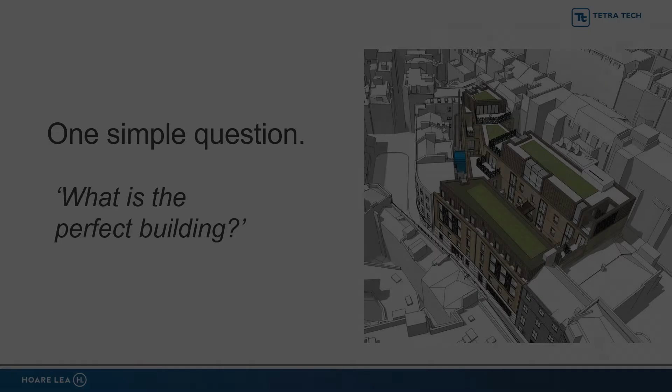It's quite a simple question: what is the perfect building? My name is Roger Mackley, and I work for a company called Hoare Lea. We're part of the Tetra Tech high-performance buildings group. We've been doing building services engineering since about 1862.

So arguably, we're probably reasonably well qualified to answer this question. A little while ago, about a year and a half ago, I had a meeting with 8 colleagues from an organization who run a lot of buildings in the UK, and I asked them this question. Funnily enough, I ended up with 8 totally different answers. What a disaster. Now, what was interesting was a couple of things. Firstly, some of them were mutually exclusive, so I couldn't have my perfect building satisfying all of those commitments. The second thing was, because there were 8 people in the room and 8 different answers, that in its own right meant that all buildings will be viewed from the position of the person who's looking. Obvious, really.

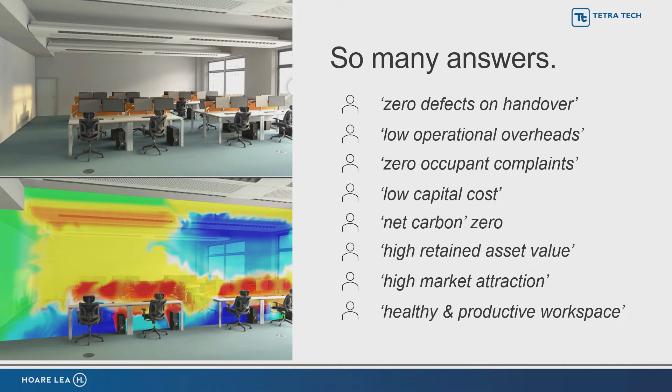So the reason I want to talk about this is because of the importance. Now, I'm going to look at this from purely and simply an environmental standpoint, so I'm just one of those people looking into the building. But I wanted to put the context in.

In the next 10 years, the population on Earth is expected to grow by 1 billion. By 2050, at this current rate, we're going to have another 2.5 billion people on the planet. People spend about 85% of their time in buildings, and as a consequence, buildings are responsible for about 38% of global emissions. But this gets magnified because 2/3 of the global population live in cities. Cities are made up of buildings, and cities consume 75% of the global resources and are responsible for 80% of global emissions.

So yes, having those perfect buildings really is important, certainly when viewed from a sustainable and environmental standpoint. There are, though, these challenges. At Hoare Lea, we look at human-centric design and we look at planet-conscious design, and there is this tension associated with those two.

Buildings are there to provide environments in which people can be productive. If we're talking about hotels, one of those metrics of productivity will be the amount of sleep you had at a hotel. If we're talking about conference centers, presumably we're not trying to get you to sleep. So therefore, we have different metrics for those different things. But because we are trying to generate that environment in a building for people to be productive, by default we are manipulating the environment. We're using mechanical systems, we're using electrical systems, and as a consequence, we are drawing down on the resources of the planet. So there is that challenge.

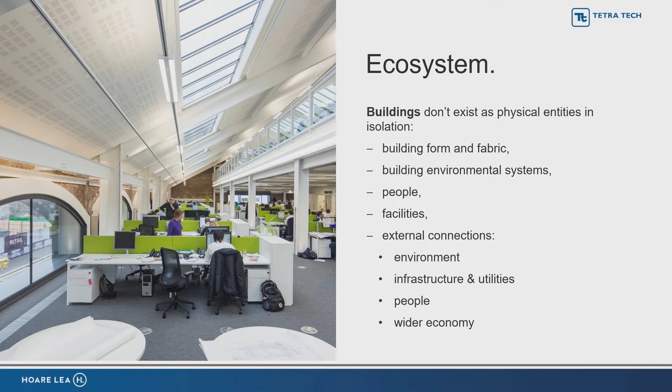But of course, what you can't see here is that you've also got the air conditioning systems, the heating, the cooling, the ventilation system, the hot water. What you also have, of course, is people going in and out of the building. And you can't see it here, but obviously there's the outside world as well.

So we're now looking at a whole series of different data sets from different systems which normally are independent. But if you start to bring them all together, you can then generate actions to try to generate that perfect building. We look at the data layering.

So in this case, for this office, you're saying, okay, well, where is everybody? Where are people in the office? Where have they come from and where are they going to? Because where they came from will impact the sort of environment they want to be in when they get there. Because if it's been really hot outside, they'll want the room they're going to go into to be cooler.

We then obviously have the air conditioning systems, the heating, the cooling, the air quality, carbon dioxide, volatile organic compounds. You've then got the day of the week, or the day of the year, the time of the day. And that's important because we want to be able to move the blinds because we know where the sun will be. The sun is a kind of a given. You know where it is every day of the year. And we think that indoor GIS can really help with this.

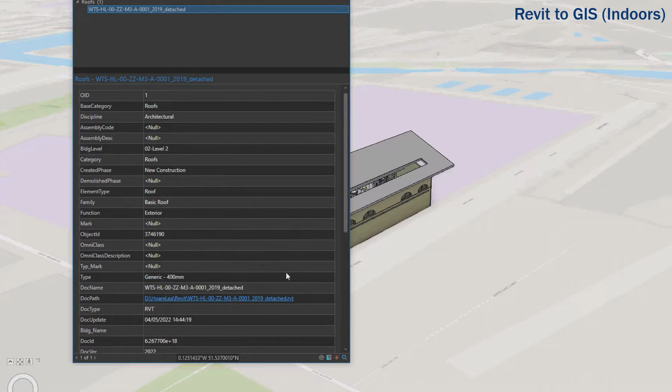So Autodesk Esri partnership, we can now drag and drop a Revit model into GIS. We can look around it. We can click on features inside it, get back the information from that information, which is all the Revit data stored inside there, which is really good to be able to understand what's going on with that building.

We can start to turn various bits of it off, so we can turn the roof off on this. We can look around, navigate around, and then we can turn the walls off and see inside the facility.

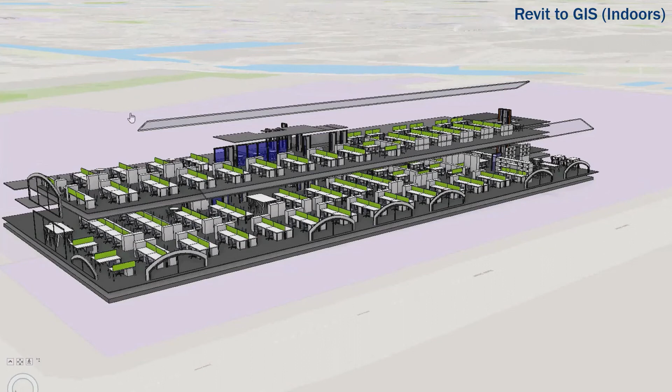So this is all really good now because what this then allows us to do is then bring that data into GIS. So with ArcGIS Indoors, we're able to import a Revit model or a CAD file plan and thematically map everything up. So this is actually looking inside Indoors. We can click on features inside it and get the same information back.

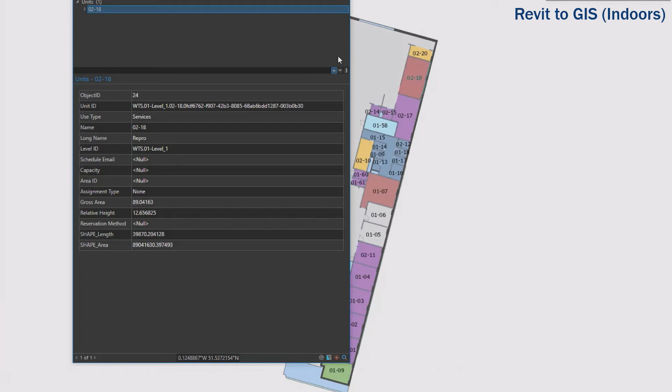It tells us if we were looking at meeting rooms. So the various colors in here, I can look at them really quickly, and I can see green as a kitchen, purple as a meeting room, which is really good. One of the other things that we can do is you get a floor plan, a floor level picker, so we can navigate really easily between the various levels inside this, allowing the user to have that full experience of easy navigation.

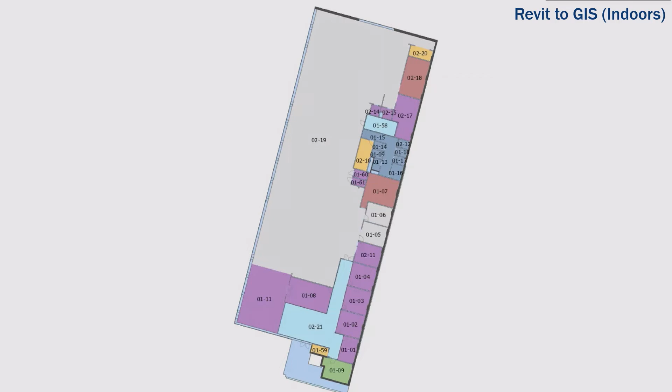This also looks exactly the same inside ArcGIS Online. So we've gone from ArcGIS Pro to ArcGIS Online now, and just to demonstrate the capability inside ArcGIS Online being almost exactly the same, you can see we've got the Western Transit Shed here, which is up in King's Cross. We can click on a feature inside there again and get the same information back in that kind of standard format that we get from ArcGIS Online.

Being able to click on features again inside here. And then we can also, again, browse by a floor. Now, the reason I'm telling you all this is because this is where we had to start to be able to look at, right, how do we start connecting sensors to data and work out where those sensors are inside a facility.

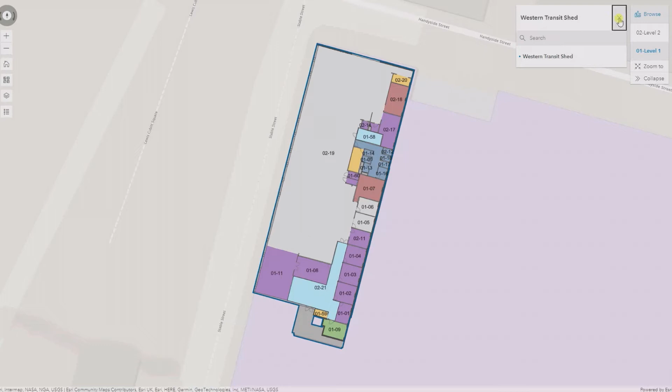So we've created a dashboard. And one of my colleagues put this together for me to make it look a little bit prettier, so that's good. So this dashboard is showing some historic data that we've captured from the sensors. So we don't have anything like velocity yet or GeoEvent Server, but we do have lots of CSV data, so we've downloaded CSV data, ran it through some FME conversion.

We were able to attach it then to the feature inside there. So we got a meeting room that we're looking at. And we could see what's going on across that meeting room back in 2019 in the month of May. So pre-COVID, lots of activity. We could see there was a big meeting that happened on one of the days. And what we'll do is we'll go ahead and look and try and investigate that a little bit more.

So one of the things that's being shown here is that we've got a score that runs. So as the day goes on, the various sensors are calculating, and they're saying, yep, it's good or it's bad. But there's also an average score that's being calculated on the fly.

We can see there's a little bit of a dip on the 3rd of May, and we want to understand what's going on there. The whole idea of the dashboards is to give that insight: there's a geographic context, we know there's a meeting room, where is that meeting room, what's the problem? So we had a big meeting happen on the 3rd, 36 people came in, and the systems couldn't cope with that amount of people all of a sudden hitting that room. Shortly after the meeting concluded, there was a dip in the score because all the calculations started coming back into the sensor.

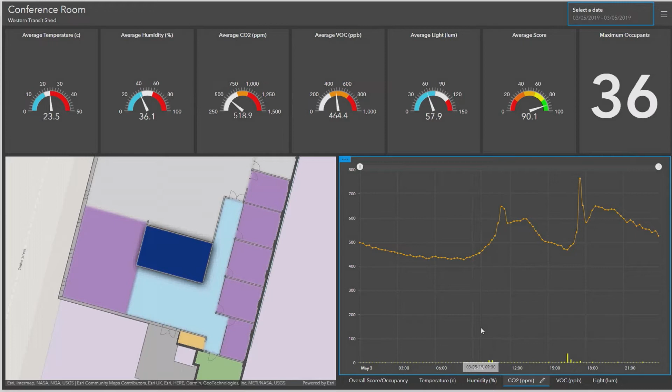So we had to wait for a little while before the next meeting could probably take place because we wanted the VOCs to all calm back out, so the HVAC system catches up with everything, and that allows us then to plan for the future.

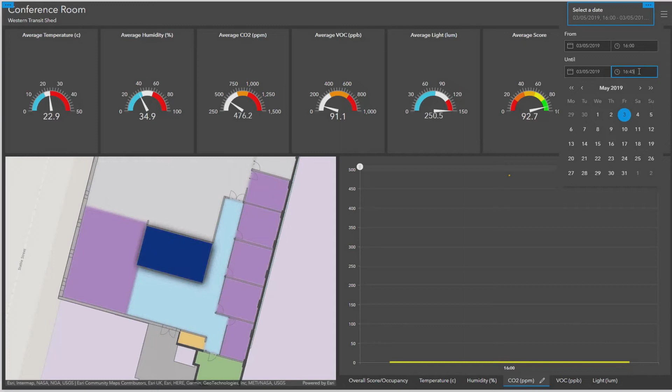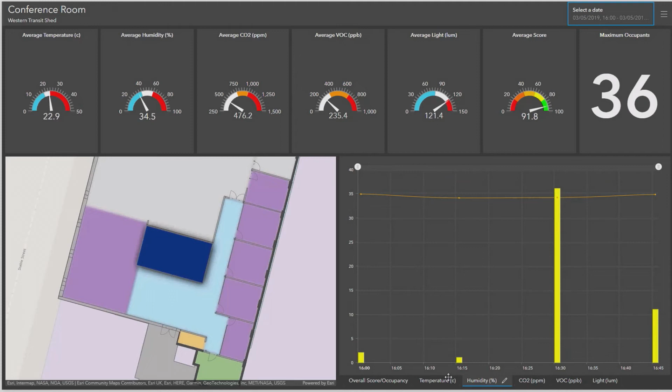Now, where we want to go with this is that instead of being reactive, we become a bit more proactive. So we know we have a big meeting coming in. What can we do to make that room ready for when that meeting takes place so that our productivity levels can be maintained throughout the day? What are the things that need to happen? Do we need to tell the building management system that we need to crank up the AC to get the temperature down, to start air circulation a little bit sooner than what we were doing previously? So that's where we're at today.

This here is one of the methods we're using to understand where people are moving through spaces right now. This is using optical sensors inside this meeting room. So the big meeting room right in the middle there, that's the one we're going to focus on. What you'll hopefully see here is some people coming into this meeting room shortly. It uses optical sensors in the ceiling, with machine learning, to actually recognize what a human looks like, and then it scrubs the image and converts this to a point on the map, which we can see as people are coming into the space.

Now, this is really good, but it is quite limiting technology, so we can't have a sensor every so often. Some of the things we've also found is because this meeting room is so big, we've had to put 2 sensors in there. So we get a bit of ghosting, sometimes there's a bit of a double count on the data that's coming through. You may see like there's a couple of people really close together all of a sudden, and they split, and then they come together. It all depends on how the sensors are reading them.

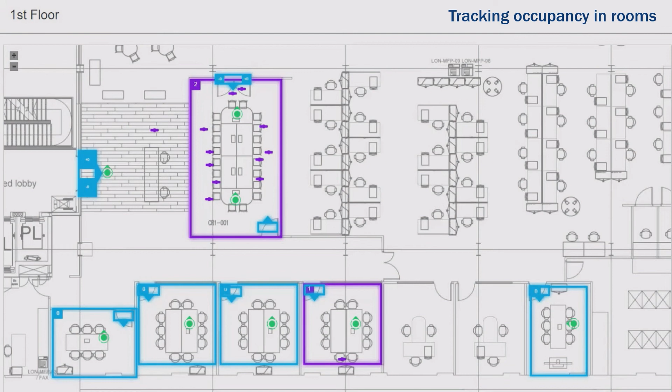That's really interesting, a problem to even think about how we work that one out. So our numbers of occupancy levels, are they being misconstrued because of the way the sensors are being read?

So where we want to go now, and this is the exciting bit, is that as this technology starts to become better and better, we're looking now at indoor positioning systems. How can we actually track the movement of people through a space and understand that? See where people are actually going to congregate, or where nobody is. Can we use the indoor positioning systems to direct employees to an area where there's actually better air conditions or better lighting conditions right now? So depending on the time of day, go over to this part of the room rather than that part of the room.

We also want to enable more sensors inside these facilities. So we've shown you a couple of the sensors in there for air quality, but there are other sensors we can potentially also enable that will help give us more response and information about the data, the building, and the way it's being used.

And you saw a great presentation just before about velocity. This is a game changer for us, really. Being able to take the live data and stream it in this way, and bring it across into the indoor environment, and understand what's happening in real time, allows us to have that next level of being prepared, being proactive instead of reactive with building management systems, ingesting that information from all these different sensors and getting those results. Thank you.